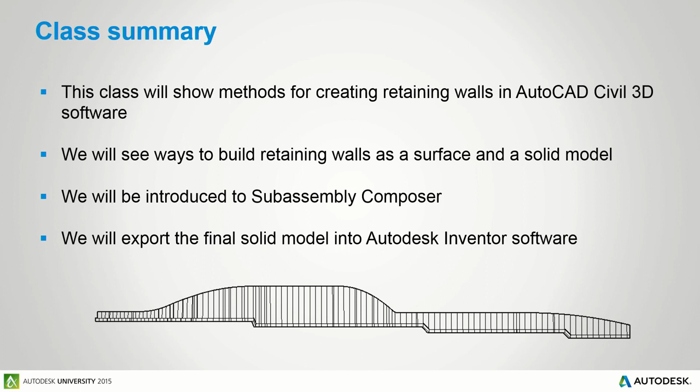Basically, the class stuff in a nutshell: you're going to learn how to design variable height retaining walls in Civil 3D. At the end of this session, you're going to be able to design a retaining wall, understand the principles of targeting, look at Subassembly Composer, and extract the model into Revit or Inventor. You're going to be able to design a retaining wall like that at the end of this session, and move it into Inventor or Revit. So you've got some good things to look at.

Also, in my notes, I put that this course was for all levels. Some of you put your hand up about going to the Ramp It Up thing, so you're obviously quite advanced users, but I'm sure there's people in here who are also beginners. That's quite a bold statement, saying we're going to deliver this course to all levels. One of your famous statesmen said you can't please all the people all of the time, and because there's a mix of people in here, I aim to please all of you some of the time. So some experts may think, oh, I've seen this before, and some beginners might think that's a bit over my head, but on average, you'll all get something out of this session.

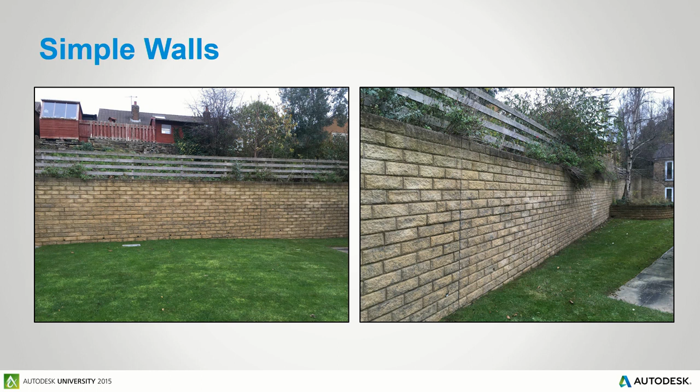But we're going to look at how we can create these in Civil 3D. I think the first thing I want to show you is that we're going to be looking at understanding the site that we're going to look at.

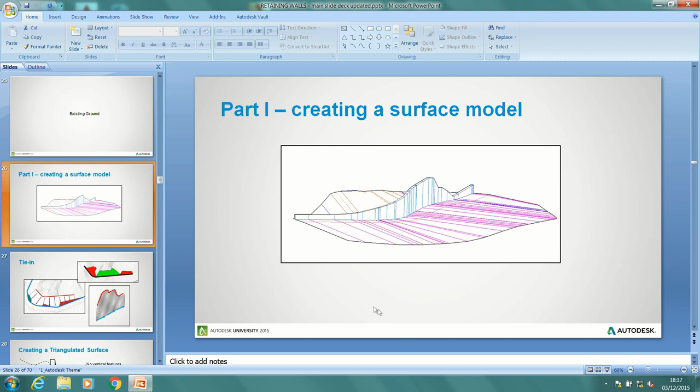Right, okay. Well, my apologies on this. What I will do is try and flip to the other PowerPoint if I can, and see if I can get to the point roughly where we are while the machine is restarting. Because we're actually going to look at creating a surface model like so.

And when we come to build a retaining wall, it's important that we have tie-in. How many times have you done a Civil 3D project and you've got the surface perfect, but not at the edges? It just doesn't tie in correctly with the rest of the model. So I'm going to be very mindful when we design our retaining wall models here that we have tie-in to the existing ground. And you'll see when my machine actually finally restarts that the road that I've driven around this model, I'm going to use that as a tie-in point.

Oh dear, that's not looking good. So Control Alt Delete, let me log in. Let's see if we have another type of input here.

And we're on number 5. So come on, please, we need to see the screen. But yes, no, sadly I see nothing on mine. Function 4. Okay, guys, I'm really sorry about this.

Bad, what do you got going on? Nothing. Okay, you need to get this up on the screen? Yeah, what are you on, number 5? 5, yeah, it comes on here. Just want to make sure we're still good. I can see it on the screen there, but not on here. Yeah, that's not good.

I suppose I could put a table at the front and just look at the screen like so. Personalize, display. Now, connect to projector is duplicate. Yeah, it's duplicate. I've tried that and the resolution goes all funny. Maybe you can just alter the resolution now on that screen. I could, but it's not putting it up there. So, it's just on there.

I have just done a reboot, so... It was up? It was. Just try changing the resolution there if you could. Exactly, adjust resolution. Right at the top. Doesn't give you much, but I can change it.

Hold on, I'm getting somewhere. You're getting somewhere? I think so. No, nothing. There's something. Wait, we've got lights, so can we duplicate that? Yeah, we have something. We're extending, let me switch it back to third monitor. What's the export, third monitor? Yeah, I've seen this on one other set.

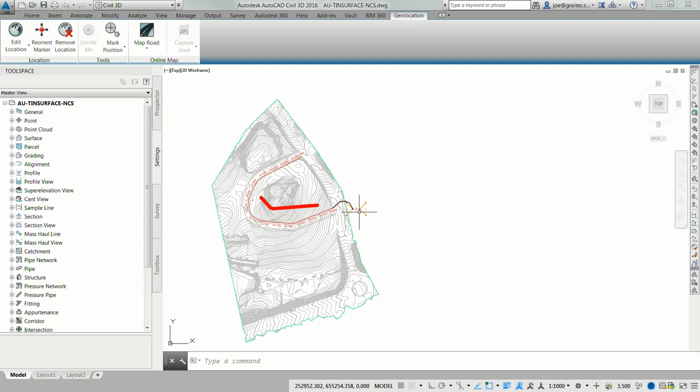And the red lines are where we're going to be building the retaining wall. This alignment here is the edge of the sidewalk upstand, because I made this particular road using this assembly, and the red line represents that point as the road goes round the track there, if that makes sense.

So what I'm going to do is just delete that, because we're going to tie into that, if you remember from my PowerPoint, which I'm going to have to open and put on the other screen. I really appreciate you guys being behind me on this. Yeah, as you can imagine.

And if you remember, what we're going to do is we're going to build the retaining wall. It's going to link to that blue line. Of course, the back of the wall, we need to get cut and fill into the existing ground. And we're going to be drawing vertical designs for the top of the wall and the bottom of the wall.

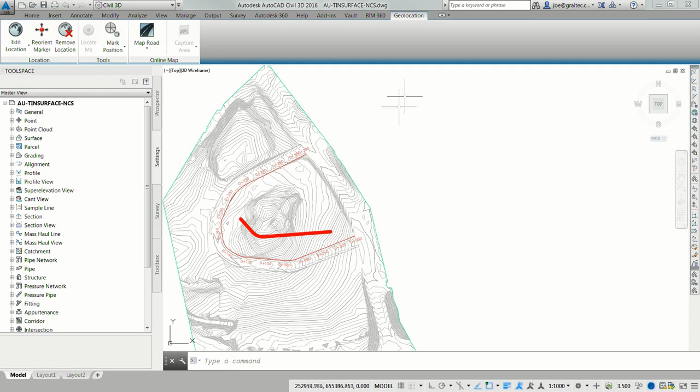Okay, so the first thing we need to do really is just have a look at the lay of the existing ground under here. This is a standard civil thing to do. We can go to profile and create a surface profile based on the existing ground, and we can add this and draw it into our box on screen.

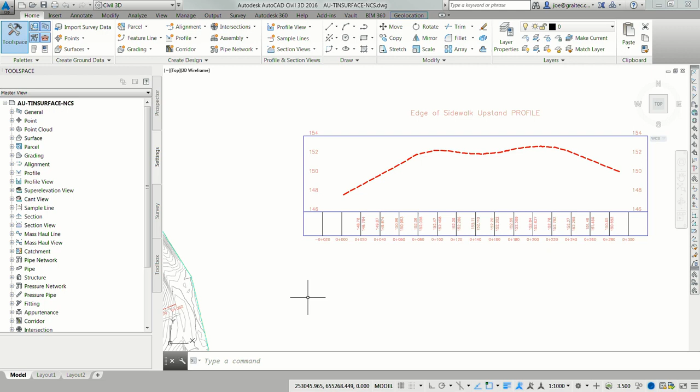So if I go create profile view here and press the profile there, you'll see we get a profile as the alignment goes around the road. And as you can see, it's a pretty smooth profile because I've already put the road on, yeah?

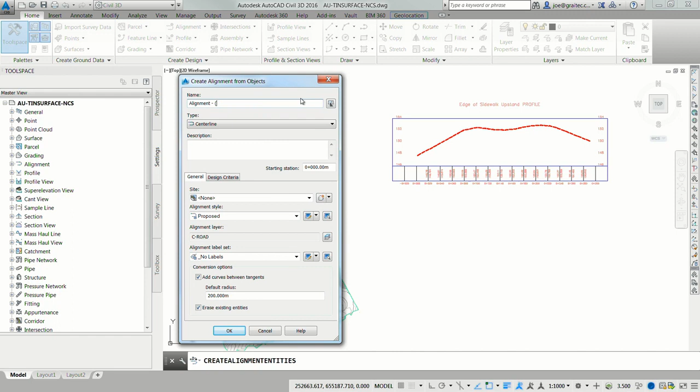What we're going to do now really is I'm going to turn this into an alignment. So if I go to alignment, create alignment from objects, and I choose our polyline, and tell it that I'm happy with the way the polyline is, I can call this alignment something like wall. I don't want anything between it, but I'll turn this into an alignment, and there you see it's there.

I'm just going to turn the surface properties of this surface off to border only, so that you can see it more visually. And again, what I'm going to do is I'm going to profile this new alignment, based on what we've got there. Now, that's the existing ground underneath that line there.

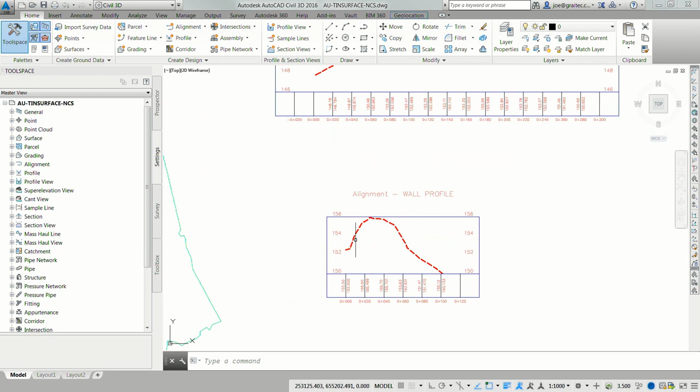But what we're going to need to do here is I need a bigger box because I need to work on this a little bit better. So I'm just going to go to the profile view properties, and I'm just going to tell the elevations of the profile to be a little bit larger. I'll have 4 meters one side, so I'm at 146, and we'll have that 160. Press OK, and you see it just makes the box a little bit bigger.

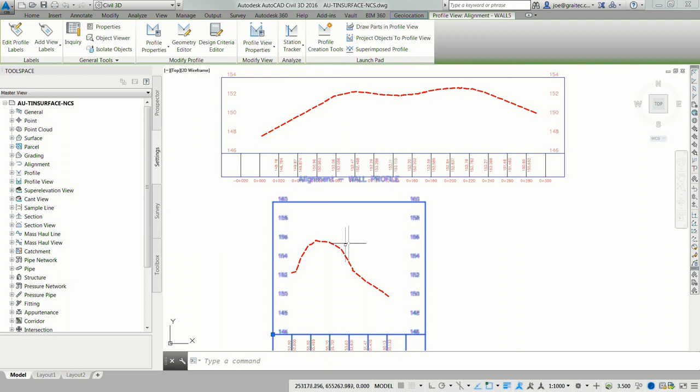And really what I want to do is see how this and that interact with one another. So I'm going to superimpose it. I'm going to select this profile here and superimpose it onto that one, if that makes sense. So superimpose profile into this box.

Now if I do superimpose that profile, notice that it goes right the way around my wall. So it'll look a bit difficult to read on here if I do it all the way. So I'm going to tell it to only do it between certain points. In this case, I'm going to choose that point there. Let me zoom in a bit as my start point.

And that point there is my end point. When I press OK, it puts the profile in position. The reason I want to do that is because I really want to see where that land is so I can tie into it. So you see I've got the profile for the top and the bottom of the wall.

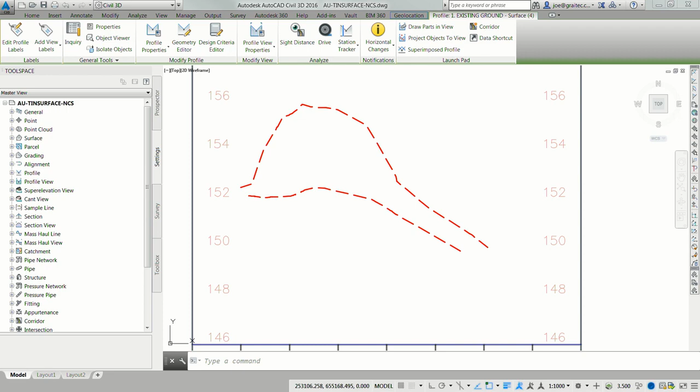Here we go, right. So what we have is we have a line for the wall which we've turned into an alignment. We've got the cut and fill of the existing ground. And what we want to have is the top and bottom of the wall. Are you with me? Bottom of the wall, top of the wall.

Now the way I'm going to work this is we're going to work on the shape of the wall that's like that. Now Civil 3D on surfaces doesn't like vertical features, so we're going to put a very slight slope on this, so that it is not vertical. And to get that, I'm going to use a 9,800% slope, because the higher the figure, the steeper the slope. It works on that equation there.

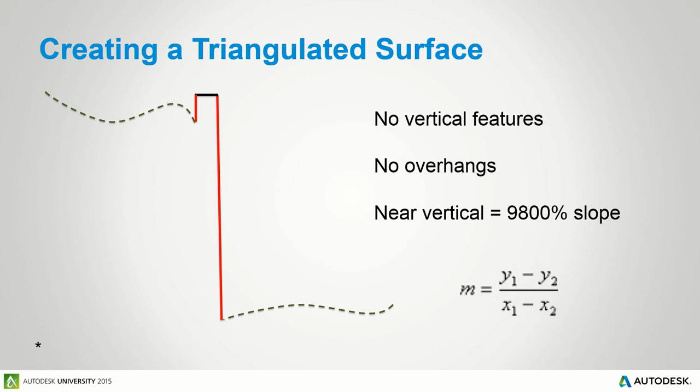So we're going to have a little slope on our design, on our cross-section, if you like, of the wall. And essentially what's going to happen there is that those two red lines will be near vertical.

And this is what we're going to end up with. This is a geometry we're going to use. We're going to turn it into a corridor. Everybody knows what a Civil 3D corridor is, don't they?

So when we come to do the corridor, this point here, this target point here, we'll be targeting our alignment. Does that make sense? Yeah.

And it will also be targeting an alignment which we're going to draw for the bottom of the wall. The top of the wall is going to be targeted at the top here. So as this is extruded along the course of the wall, this will grow between one target and another. Of course, we're going to have to put some sort of geometry down here in order to link in to this line, to fill in this gap here, which is where our housing's going to be. But nevertheless, that won't be a problem.

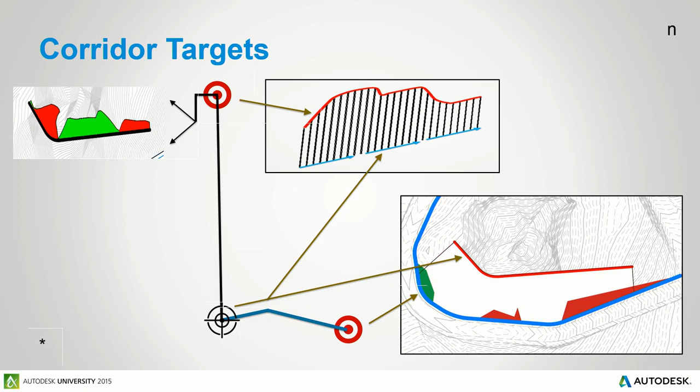And finally, we're going to target the existing ground up here for cut and fill. And we've already got the existing ground profile, and we've already got that projected edge of the sidewalk, haven't we? We've got those two profiles already.

What I'm actually going to do is add two more profiles. One that signifies the bottom of the wall, and notice I've put it up from the targeted ground, and one that targets the top of the wall. That way we can run this profile.

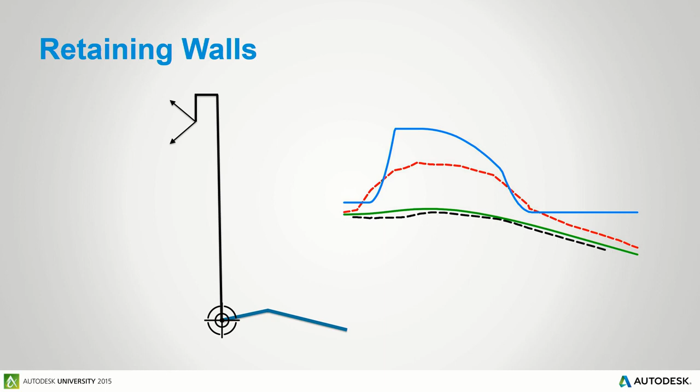The pavement upstand will target this black line. The bottom of the wall will target the bottom of the wall line. The top of the wall will target the blue top of wall, and the cut and fill is going to target the existing ground, which should produce us some sort of effect like that in Civil 3D, which will give us a surface with all those targets. Is everybody happy with that?

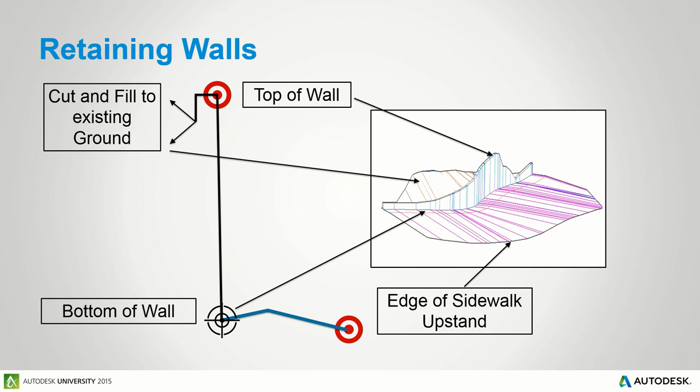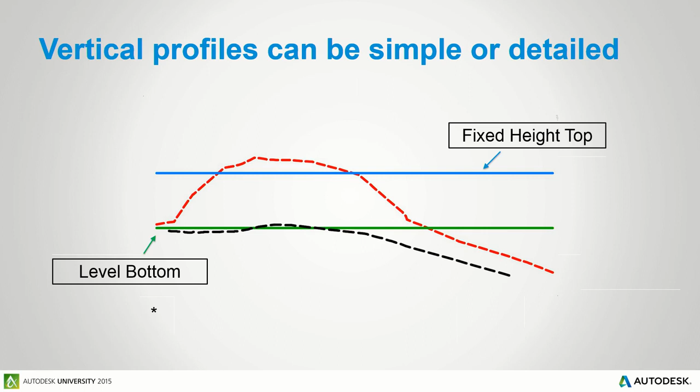So we've got top and bottom of wall, which we're going to look at making. But that top of the wall doesn't have to be variable, it could be flat. You could draw the profile flat, of course. Same with the bottom, or you could have them of a fixed height, top and bottom. So you've got the possibility of using all these, but I'm going to use the most complicated scenario where both top and bottom of the wall are varying.

Now to do this, we're basically going to be using the generic sub-assemblies inside Civil 3D. A bit freaky, but does anybody use those? I can tell you use them, Leo. Freaky, freaky naughty.

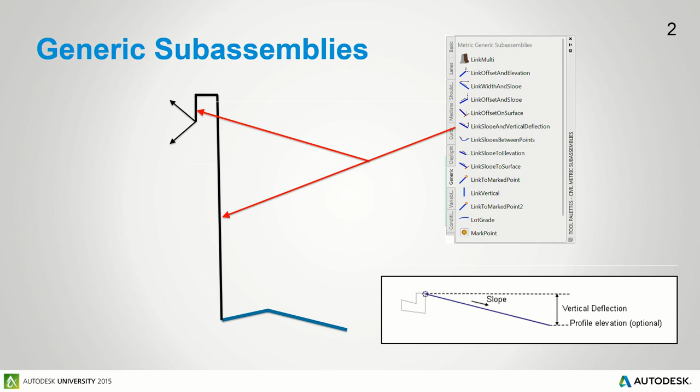Finally, we're going to use a basic cut, ditch, slope thing for the cut and fill. Now, I usually use my own cut and fill, but I'm going to use the one that's shipped with Civil 3D so you can see how it works. So let's see how we can go about building this wall.

And we're on this screen now, aren't we? So the first thing I need to do is draw the bottom of the wall profile. So if I go to profile here, profile creation tools, select this profile box. I'll just bring the box onto the other screen. I'll make a different design profile, call it Design Profile A.

And all I'm going to do here is just start drawing the bottom of wall. I better give it a name - bottom of wall, okay, I can't spell, but you get the idea.

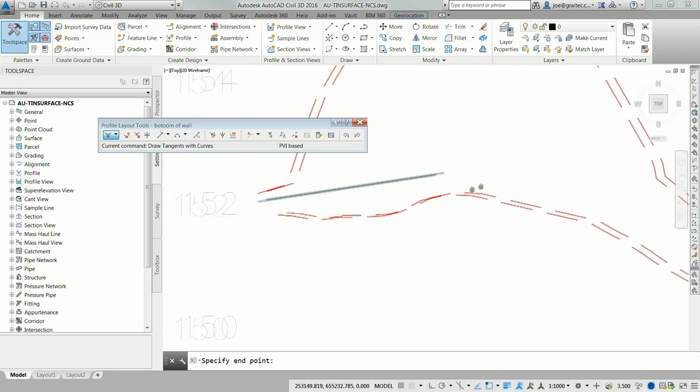When this box pops up, you'll see I can use all these tools to draw this bottom of the wall. Normal Civil 3D users should be familiar with this, but I'm just going to draw it using the bottom of the wall starting there. We'll have it going over there. It doesn't really matter, I can make this as complex or as simple as I want. If I tie it into the end here, it means the wall will tie into the existing ground, which is good. So there you see, that's the profile for the bottom of the wall.

I'm now going to make a profile for the top of the wall. Same thing, choose a different style. I'll choose style C. Again, I can make this as complex or as simple as I want, but in this case I'm going to...

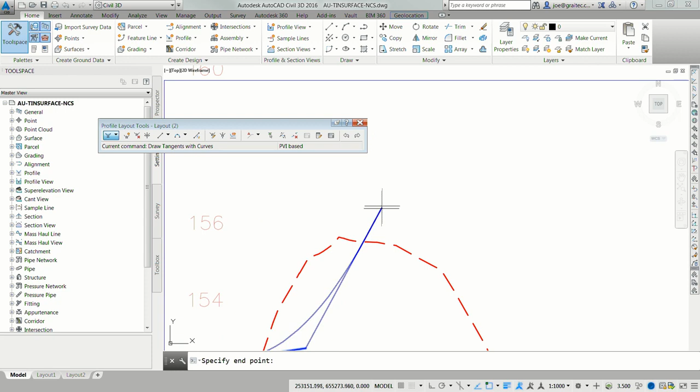Start the wall - come on, object snap - over here, and then we'll go up fairly high, across, down. Again, I can make this as simple or as complex as I need to make it flat, and then we'll finish the wall, say, up there.

So now what I've got is the two profiles I need for bottom and top of wall. All I really need now is an assembly to run across this. We can just create assembly from here, create the assembly down there, I'll call it wall, press OK, and put the anchor point there. Remember that anchor point is going to follow the bottom of the wall.

So what I need to do now is add some subassemblies to that, and I need the tool palettes on screen to do that. And here they are, here are the tool palettes. I'm going to use the generic tool palettes that I mentioned, the freaky ones.

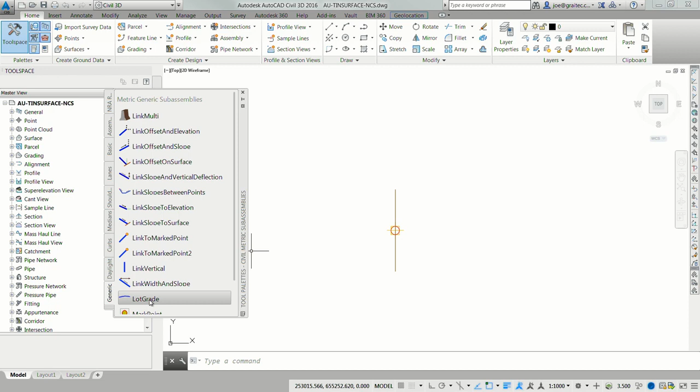And I'm going to start with a lot grade. Now, if you want to know what these do, you can just press function 1 - I know function 1 goes to the help, but I know I haven't got an internet connection, so I'm not going to do that. I'm just going to put the lot grade there. Remember, it's this point here that's going to target the edge of that sidewalk.

Then I'm going to put these link slopes and vertical deflections in. Let me just put one on. Oh no, it goes in the wrong direction completely. But if I re-examine the properties of that - right click, whoops, come on, right click, properties, come on, properties, where are you? There you go.

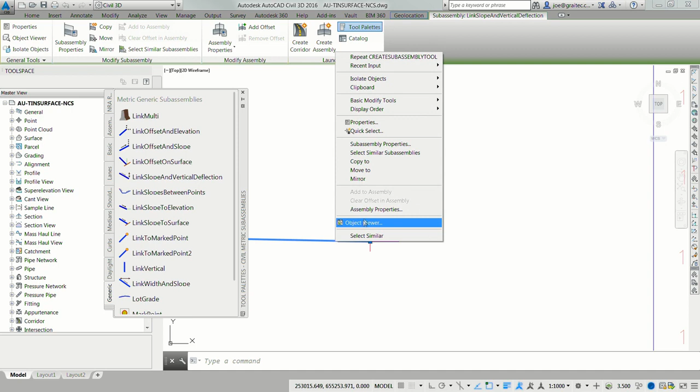And then bring it on the other screen - come on, you're on the wrong screen. Here we go. I can go down to this and I can change its slope. I'm going to make it 9,800%, and I'm going to make it vertically go up by, say, 10 meters. So you should see now that I'm beginning to build the side of that wall.

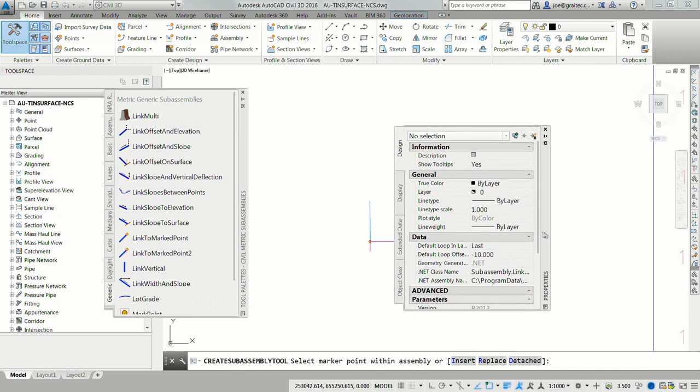And then the next thing I'm going to do, I'm going to put a link width and slope at the top here. Again, if I can crick my neck to see this properties sheet - I probably want the width a little bit smaller, say 0.5, and I want it flat at 0%, so that it's going to be a flat slope. And again, I'll just attach this to the top here like so.

Once more, I'm going to put a link vertical slope in. Again, I'll use the value of 9,800% because I want this to go down by about 0.5 of a meter, like so. I'll place that there.

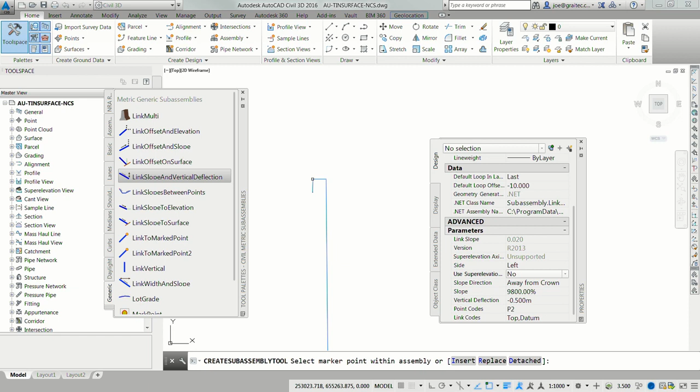Finally, I'm going to put one of the basic cut fills on, which will hit there. It's got a ditch on it, hasn't it? I'm going to make sure the values for the ditch are pretty small, so I'll have 0.2 there, 0.2 there, and 0.2 there. That should make it a nice little cut fill.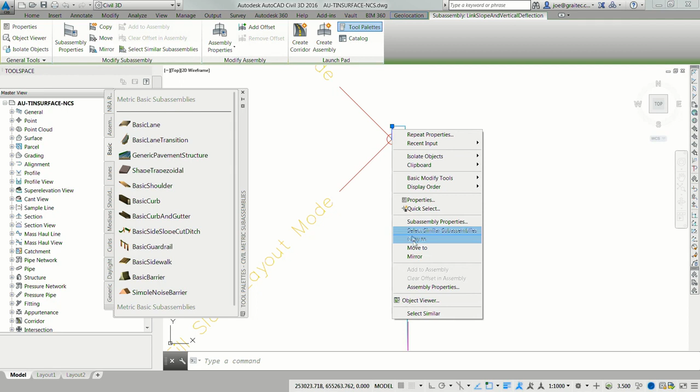Okay, I've got everything I want there. Remember, the ones involved in the targeting are this guy here and our cut fill. These other two, this one at the top, aren't being used as a target. So usually I'll rename them not for target, NFT, so I know I'm not going to be targeting them. I might spell that wrong, and I can hardly see at this angle, but you get the idea.

Next I'm going to make a corridor of this, because I said it was all about corridors. Let's call it wall. The alignment of the wall is going to follow the bottom of wall profile I made, isn't it? And the assembly I'm going to use is the one I've just made, and the cut fill is going to target the existing ground. Press OK, and this box opens.

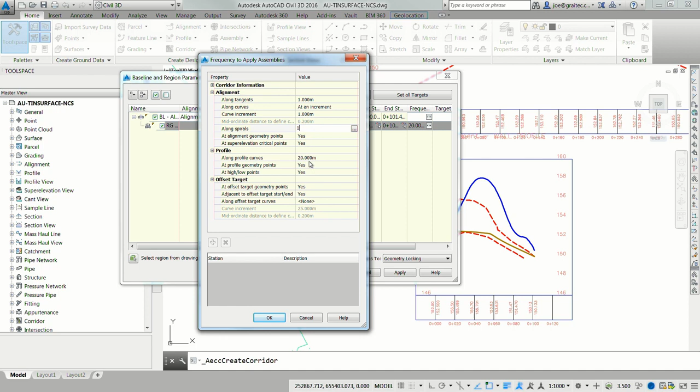Now, the targets I'm not going to be bothered with, I've labelled. Do you see? The lot grade, the edge of the lot, that's going to target the line around the pavement, isn't it? So I'm just going to add that as a target, so the end of the lot's going to hit that pavement target.

And then it's going to target vertically as well. So I just choose the edge of the sidewalk and tell it to target the vertical profile I drew up, if you remember. And then, of course, the all-important top of the wall needs to be targeted.

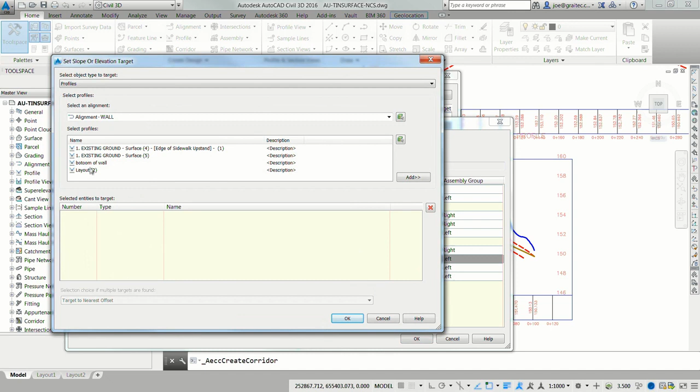Looks like I called it layout 2, sadly. I should have called it top of wall if we were going to do this properly. Press OK, OK, and then OK. And away we go - we should have a corridor.

If I look at this in Object Viewer, which is on the other screen, you will see quite clearly that we have, hopefully, a nice retaining wall. If I can only navigate on this second screen, I'd be okay. Let's try that again - there you see, there's the wall, drawn in situ. Does that make sense?

Now, that really is the quickest way of doing that. And Leo, you know, I've been to the Great Wall of China. I have visited the pyramids of Giza. I've even seen a grown man satisfy a camel. But never in all my days have I been able to make a retaining wall so quickly in Civil 3D.

Okay, so back to the PowerPoint, I suspect. So that's making our surface.

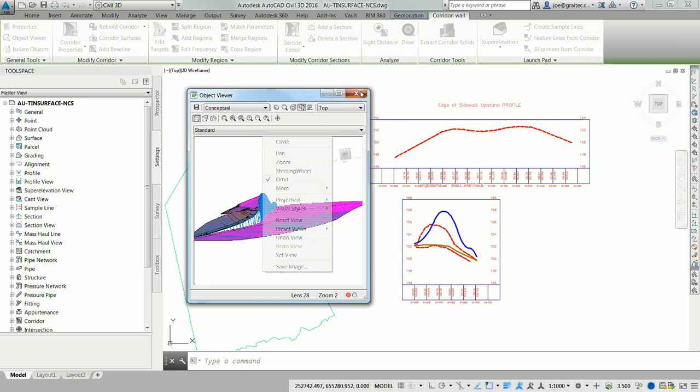We can also make a surface of that with a corridor surface, of course. But we'll move on from this because I want to take you to the next step, which is creating a solid model. We've made a surface model - the next step up is to make a solid model of that. The reason being, surface models are great in Civil 3D, fantastic, but you can't really take them out anywhere and do anything with them. They're great for showing a quick mock-up of what it's going to look like. But if you're building a wall, you really want a solid model to get its properties out of.

What we're going to do is take the targeting principles we used before, target to the top of the wall and to the bottom of the wall. We're also going to add things like stepped footings, because the footings don't follow the bottom of the wall, they're always horizontal. Also, we're going to look at variable width footings for our solid model. A cantilever design needs larger footings the more earth it's holding up, because that's what takes the load. So the higher the wall gets, the larger the footings need to be.

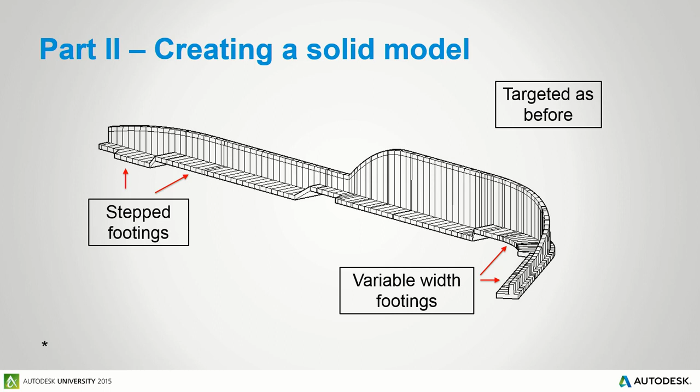But you don't want variable footings - the variable footings you need to be in distinct, discrete sizes, like 1 meter, 2 meter, 3 meters. So that's what we're going to do here, and there you see the example of the way that the footings can be different sizes to hold different loads.

Now, there's some stock retaining walls in Civil 3D. Has anybody used these? No, because they're not very good, are they? I've tried my best to use these stock retaining walls. And do you know, Leo? They're about as useful as a poop-flavoured lollipop.

So we don't use those, we have to design our own. And do you know what we use to design our own?

Subassembly Composer. I suspect that maybe 50% of this audience has never used Subassembly Composer. Is that right? Hands up who has used it. Well, that's about right there. Maybe 60% haven't used it.

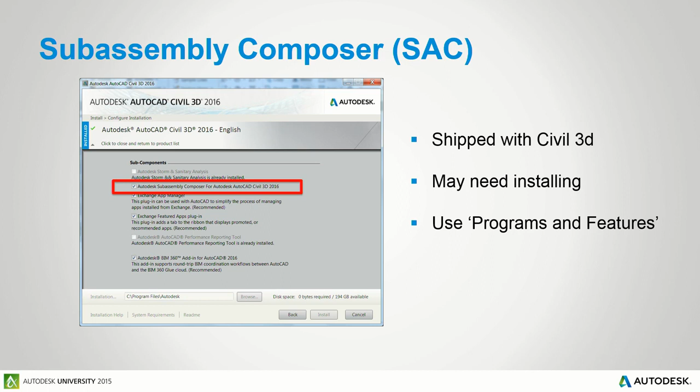What Subassembly Composer is, it comes with Civil 3D. You might not have installed it when you put the product on. And if you need to put it on later, just go back to Programs and Features and tick the box to install Subassembly Composer.

I'm going the wrong way, aren't I? Come on, go the right way.

So let's just think of the assembly that we want to design. Well, if you take the basic wall that we just had, we could make it into a solid by just basically filling it round, couldn't we? Where the bottom of the wall is targeted there, as it did with our surface, and the top of the wall is targeted there. We probably need an attachment point there to attach our cut and fill to.

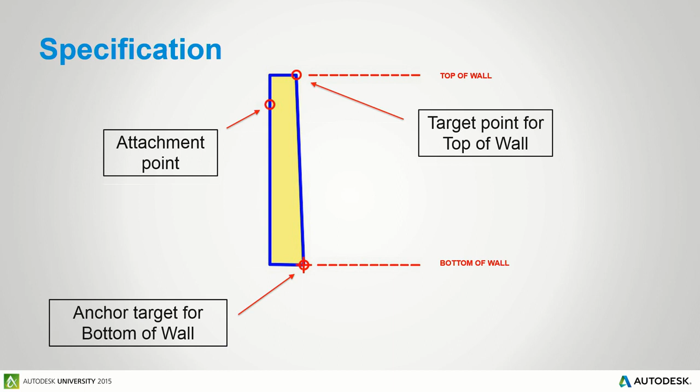But if you think about it, these target points that we're going to design in Subassembly Composer will appear in our targeting box in Civil 3D.

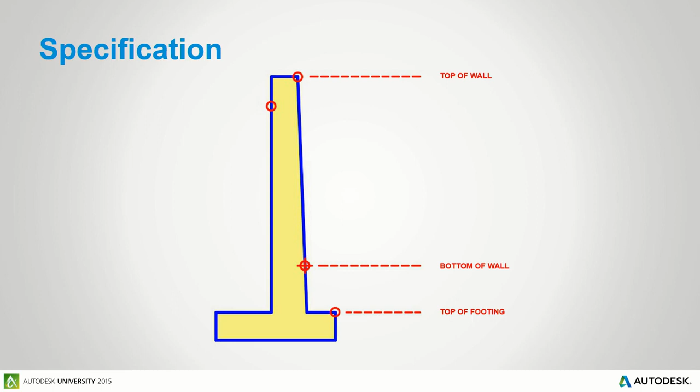And if we take it a step further and put the footings on, we probably need to have another profile to design where the footings are, which needs to be stepped. And this point here will be the target point for the top of the footing.

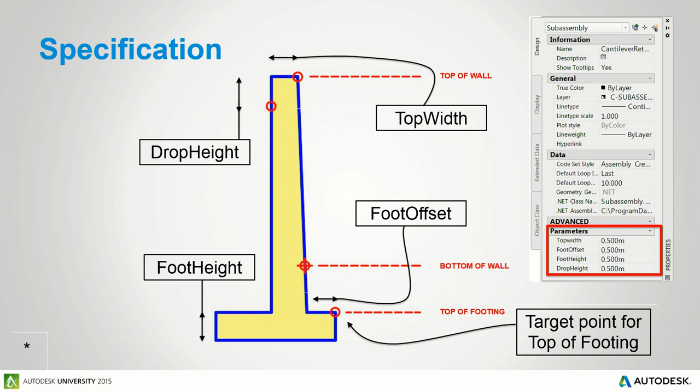And there are other types of variables we'd want to put inside our assembly, which will enable us to change it when we come to placing it in there. And these will appear on the assembly side - top width, foot offset, foot height, drop height. So we've got to think about putting these in our design for Subassembly Composer.

And then we come to the variable width footings. Now this is a tough one, because as the wall height changes, as it gets bigger, this foot width has to change and get bigger too, so that the cantilever will actually work.

And to do that, I'm just going to use the mechanics of a very simple table. I'm going to say if that wall height is less than a metre, we're going to have a 1.5 metre foot width. If it's between 1 and 2.6, we're going to have a 2.5 metre foot width. And if it's greater than 2.6 metres, we'll have a 4 metre foot width. You could have a lot larger table - I'm just demonstrating the point here, and I want to show you that we're going to work on this very simple table.

So before you start, create a specification document, is my advice - something like this. So don't crack open Subassembly Composer, roll up your sleeves and try and get working, because you'll get lost very quickly. You need to think about your design first. Put a specification document together.

Now, is it necessary to have a specification document, Leo, do you think? Necessary? I'm going to use that quote again because it's my favourite - I can use it twice. Is it necessary for me to drink my own urine? No, but it's sterile and I like the taste. So yeah, we're going to refer to this specification document all the way through when we're in Subassembly Composer.

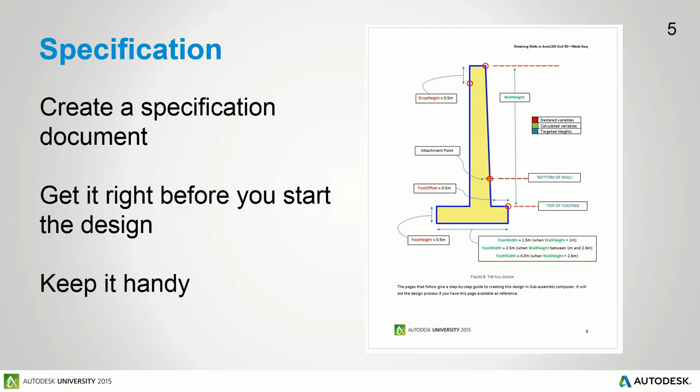Right, let's see how we go for this now. So, Subassembly Composer - you can't see on my other screen, but I'm just opening it up.

I'll drag it across onto our main screen. For those of you who've seen this before, or haven't, all our geometry and functions are on here. This is a flow chart that shows you how we build things. We can see the properties here, and over here is a preview of what we're going to be building.

Now what I'm going to do first is click here and put those variables that you see on my specification document. I'll take these parameters and put, say, top height. That'll be the height at the top of the wall, and I'll make it a default of 0.5 of a meter. If I put something in that I'm not saying, tell me.

So the next thing is drop height. That's another variable, and I know these variables need to be in there because I've made my specification. I'll have that at 0.5, and then the next variable is going to be called foot height, which is the height of the footings. Again I'll set that to 0.5.

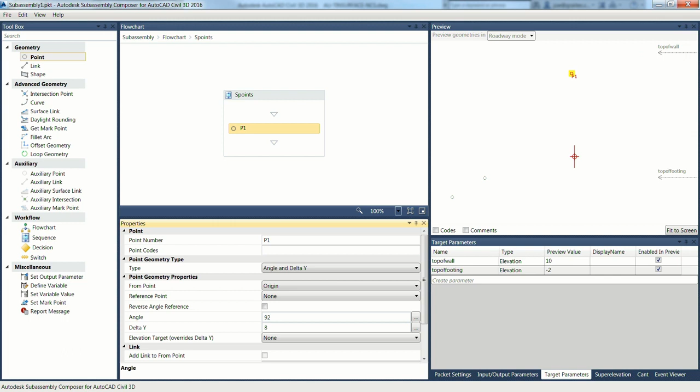But I'm going to override this with the elevation target, so that whenever the top of the wall changes, it's going to hit the top of the wall. Did you see it change there? That's my first point. Second point, let me drag this in.

For the second point, I'm going to change this with delta y and delta x, adjusting it in x ever so slightly with the top width variable. So if I take minus top width here, it will make the new point just over here, 0.5 of a meter from my original point. Has it done that? Let me see from where I am.

Delta x, delta y. I've spelt it wrong, haven't I? Yeah, what did I call it? Case sensitive? Top height, I called it. No, it's not case sensitive, but it's idiot sensitive, I think.

So there we go, that's the top one. The next one I'm going to drag down is point 3, which is going to be the drop height. So again, I'm going to choose delta x, delta y from point 2, and make it minus in the y, minus drop height.

So you can see how I'm constructing the points in this assembly. Those points there. So the next one I want, point 4, probably needs to be a point down here somewhere. I'm going to note it from the origin, and make sure it's 88 degrees. I'm going to have to change it to angle and delta y. My angle is going to be 88 degrees, and I'm going to take it -1 down.

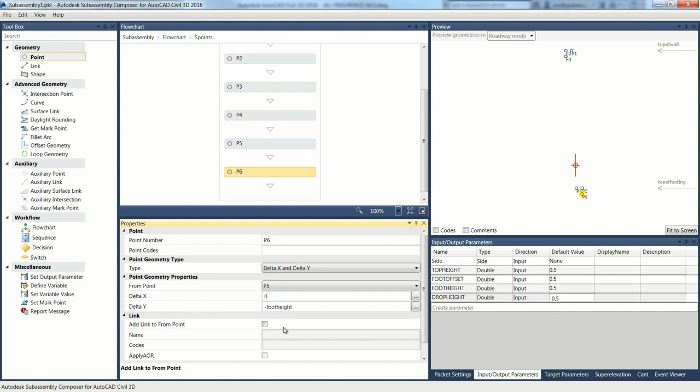Now we've got to consider our very important foot width. Remember, that's been defined by this table. We want the foot width to be dependent upon the distance between the top of the wall and the bottom of the wall. Now, I've got to put a variable in there to control this.

And to put the variable in, I just click out this flowchart and add another sequence in here, and I'll just call it variables. Because I actually do need to put some variables in there.

The first variable I want to define, again, I just drag the define variable in there. The first variable I want to define is the wall height. We need to know the height of this wall. And that's going to be the difference between the y-coordinates of this point here, P1, and this point here, P4, isn't it? So I can just put an expression in.

It's quite a simple way of putting expressions in. I just choose P1, find its y value, and take away P4's y value. And that will give me a variable of wall height. And as we run this across the alignment, the wall height will change. So that's the variable that we choose.

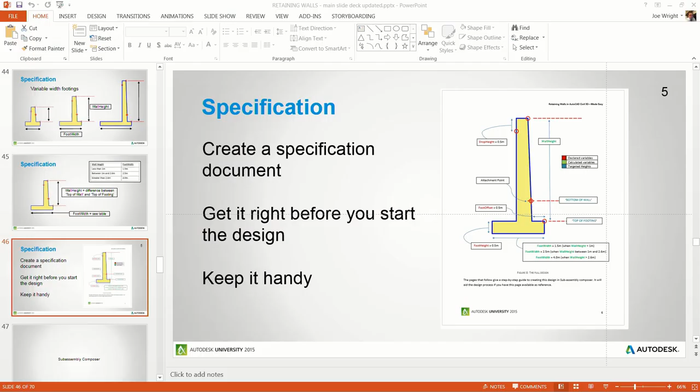But I also need another variable called the foot width. And this is dependent upon wall height. So how are we going to do this? I'll put it in first, foot width. And we'll just pop back to the PowerPoint so I can explain this in a little bit more detail.

Right, so how are we going to get it to calculate this all-important foot width? Well, you see the table is there quite simply. And we're going to use an if statement. Has anybody used an if statement before? One. Well, you know, Leo, this is going to separate the men from the boys.

From the possibly feminine and the definitely Canadian. So you look at this if statement, it sometimes can go over people's head, but this will make Subassembly Composer useful to you. Let's just spread it apart a little bit first, because the if statement works like this.

It gives you a condition first. It says, is wall height less than 1? Well, if it is, it's going to give you that number there, 1.5. If it isn't, it's going to give you that number there, 2.5. So even though it looks complicated to start with, the if statement's very basic. It asks a question, and if it's true, it does one thing, and if it's false, it does another. Now, that caters for 2 of our 3 possibilities in this table.

Let's just have a look. I will actually copy that out, because I can't be bothered typing it in. Copy. And then I go back to Subassembly Composer, not Civil 3D, Subassembly Composer, and I'll go down here and Control V to paste it in. And it looks like I've missed a bracket.

Yeah, okay, so cool. And that's our if statement, which is going to control the width of that footing. Now that I've done that, I can continue putting my points in.

So what I'll do is make another sequence here. Whoops, come back here. Yeah, there we go, double click, and I'm going to add more points. So my next point here is going to be point 7, which is going to start from point 6, but it's going to go back based on that foot width that I've just defined as a variable.

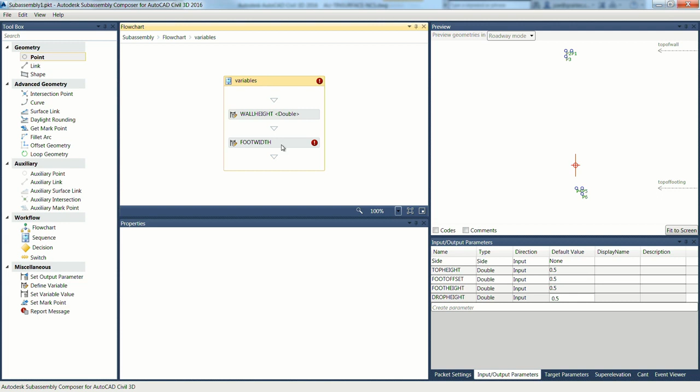Yeah? Oh, maybe it's not. Let's have a look. Did I call it foot width? It is capital sensitive in this case. Oh, it doesn't like it for some reason. Variable type - I forgot to give it a double. There we go, fantastic.

So if I go back into here now, point 7 is defined as minus the foot width. Is that looking... yeah, it's spot on. I don't know what the green thing is though, that could be a problem. No, that's my cursor, that's why. Right?

Let's do the next point, which is going to be up by this foot height that we defined. But obviously I need to choose point 7 to go up from. And then the final one needs to be where this and that intersect.

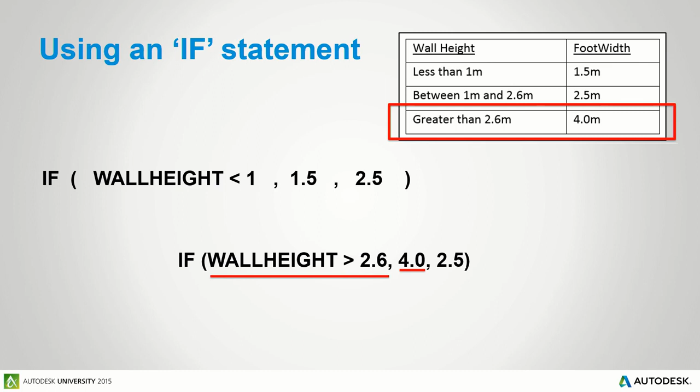Let me show you that on the PowerPoint. And click. Going back, aren't we? Too many animations on this slide. So there we go, that's where we got to.

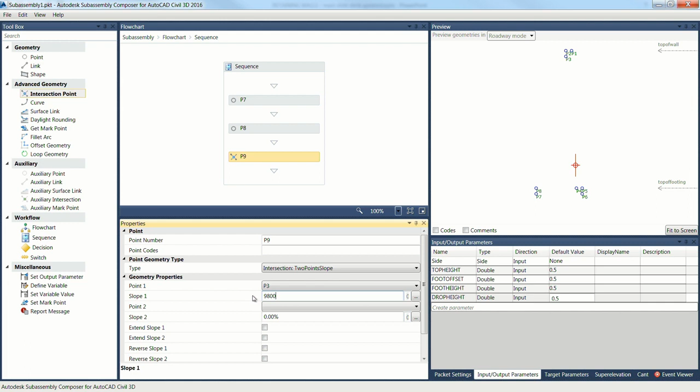So let's go back to Subassembly Composer. At this stage, what I need to do is add what we call an intersection point, do you see? I drag this down, and I want it to be the intersection between 2 points and a slope. My first point is going to be point 3 at the top, which I want to come out down 9,800%, nearly vertical. The next one's going to be point 8, and I'm just going to extend that to there. You see, it gives me the confluence of the two.

Just check that looks all right from here. Yeah, that looks good. So do you see we've got the points that make out the side of the retaining wall. So now what do? Well, we need to put meat on the bones - we need to add lines to join these points together.

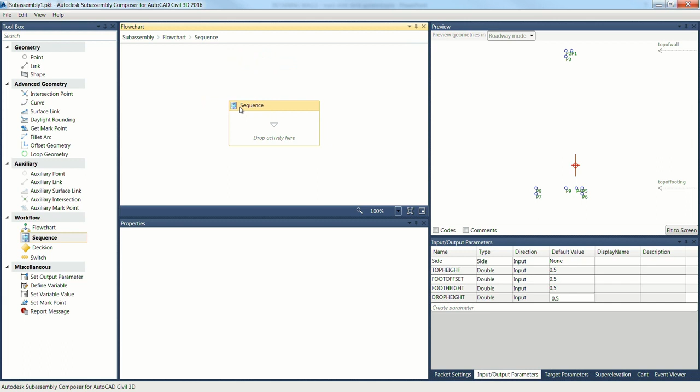Now that's quite straightforward. I'll add another sequence - no, I won't add that. I'll add another sequence first of all here, and double click to go into that sequence, and start adding links, which are lines. So if I drop the first link in, I can choose that I'm going to link point 1 to point 4, for example, which puts that line in.

Yeah, drag another link in. I'm going to link point 1 to point 2. This is a little bit of a laborious task, so I just ask you to bear with me. Next link in, point 2 to point 3.

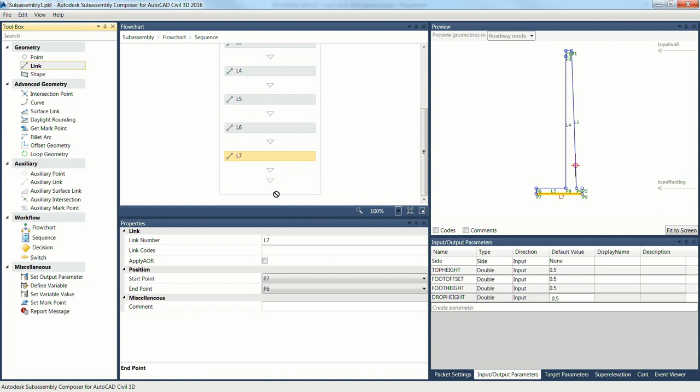Next link in, point 3 to point 9. Next link in, point 9 to point 8. If I screw up, guys, tell me - I can hardly see the screen. Link 6 is going to be point 8 to point 7. And then we're going to have point 7 to point 6, and then point 6 to 5. And there we go.

We should have a fully encompassed assembly. Do you see? Have I missed something? Oh right, yeah, well done. You guys are on my side, I appreciate that.

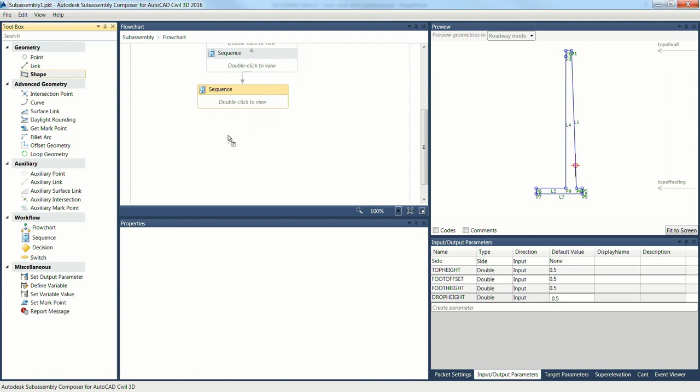So we'll put the link right at the bottom, 4 to 5, was it? It doesn't matter which way, either will work. So now we have it fully encompassed. But we want to make this into a solid, so we've got to put a shape in the middle of it - that's what this shape does here. So I bring the shape in, and all I need to do is choose something inside that, and it will make a solid of it.

I can now finish with Subassembly Composer - I've done my design. So what I'm going to do here is just save this file. I'll call it AU 2015. Why not? And we've done - that's our subassembly composed, if you will.

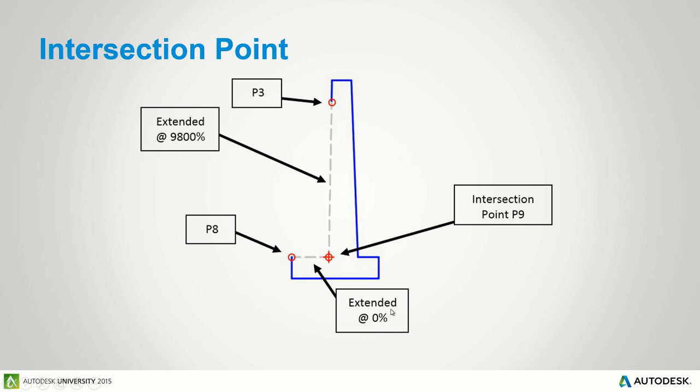So now what we need to do is just look at the PowerPoint just to make sure. So now we've got that - we're going to make it into a solid model. That's all we need, really, was that assembly to include in our corridor to make that. Let's see how it's done.

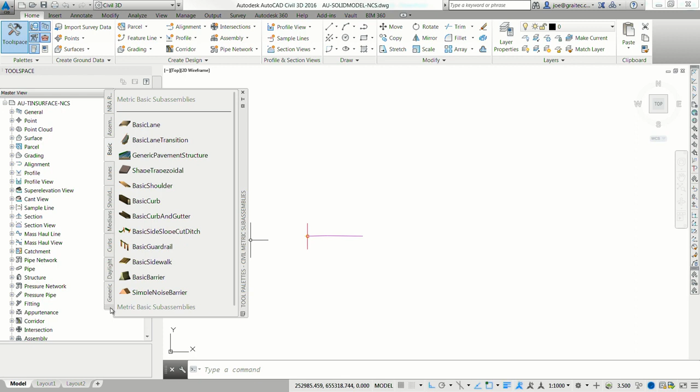What I'm going to do, I'm going to bring in a new assembly, and to do that I'm going to have to import it onto a tool palette. So I'll right-click here and make a new tool palette - I'll call it AU 2015. Then just right-click and import subassemblies, give it a source file name - let's say AU 2015 - and press open. And it will put it on there.

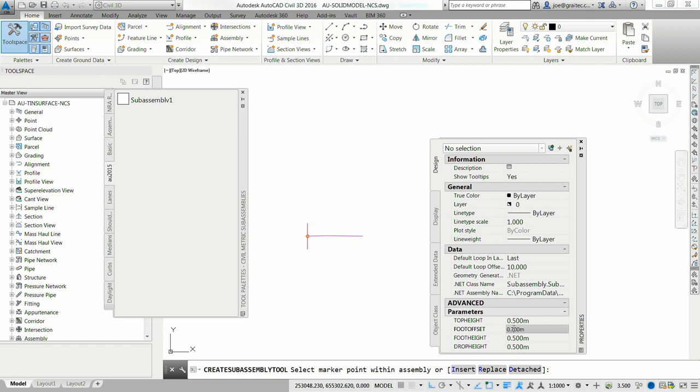I should have really saved it with a picture, but I didn't. When I click it now to bring this subassembly in, notice my variables are at the bottom here - the top height, the top width, the drop height and so forth. All these are changeable. So if I wanted the foot offset to be 0.7 of a meter, I could change it to say 0.7. Then I can just drop my assembly in the drawing here on that particular tab - do you see? It's in.

Done. All I need to do now is maybe just put the basic cut, fill, ditch, slope thing on, and I should have an attachment point there because I designed that point in my assembly - can you remember?

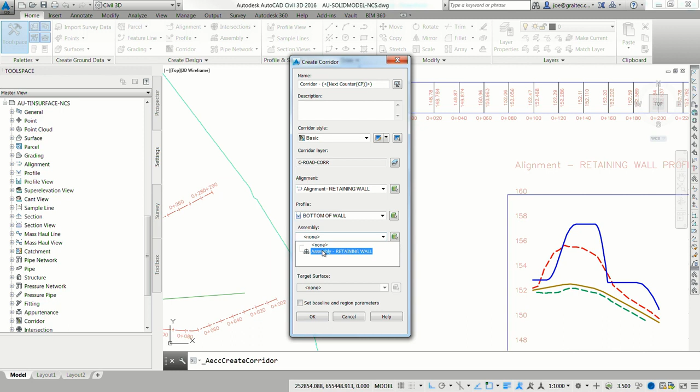And I'm really ready to run this now in the corridor, so let's make a corridor of this. You all understood how I built it. I'm using the retaining wall alignment again, and again I'm following the bottom of the wall profile. The assembly I'm using is the one I've just designed with my Subassembly Composer thing in there, and the target surface is going to be the existing ground just as before. I'll just change the frequencies as I did first time round, just so it looks a little bit nicer.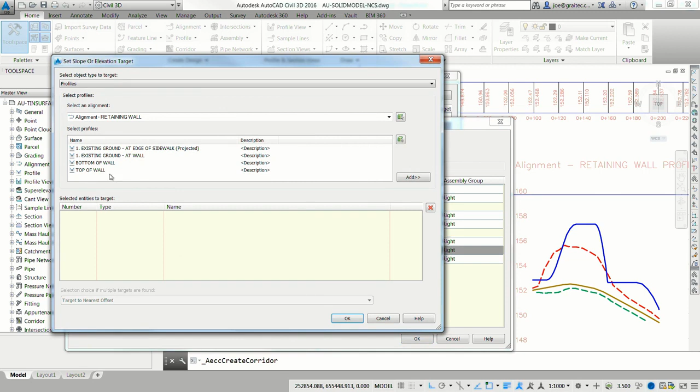2, 2, 2, 2. And we'll look at setting the targets. Now the targets are a little bit easier to understand now, aren't they, because I gave them names in Subassembly Composer that make sense. So first of all we've got this lock grade we need to target just as before - there's no change in how we target that from the previous exercise. And then we can target the top of the footing, which we haven't got yet, so I need to draw that. But at this stage I can target the top of the wall, can't I?

Like so - and this will make a corridor without the stepped footings. So press OK, OK again, rebuild the corridor. And there you see I have my corridor, which if I look at it in Object Viewer, and if I can navigate at this angle, you will see I've got my corridor there that's essentially ready to go.

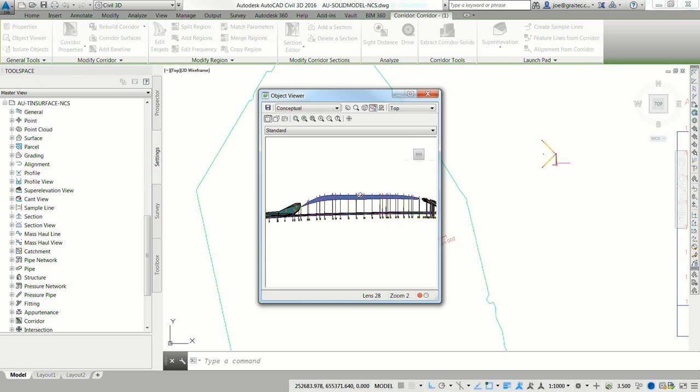Just look at it from an elevation, but you'll see the footings are not stepped - can you see that? The footings are actually following the bottom of the wall. That's not what we want - we want the footings at discrete levels. So how are we going to do that? It's easy, we're just going to draw a profile - another profile. Let's do that.

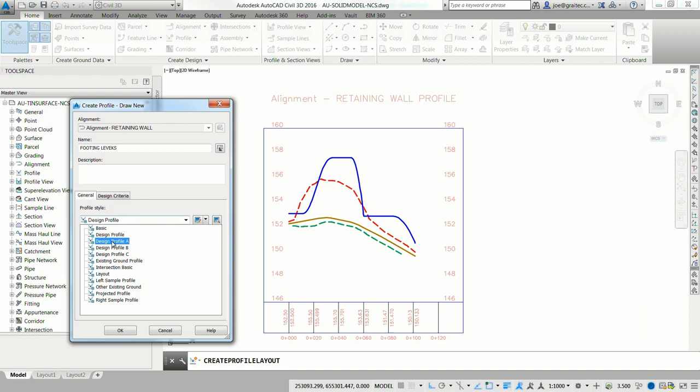So go to my profile box over here. Again, pretty standard Civil 3D stuff, drawing profiles. You click the box, I'll call it footing levels. It's spelt wrong. And I'll give it another design profile, I'll call it A, and place this on here.

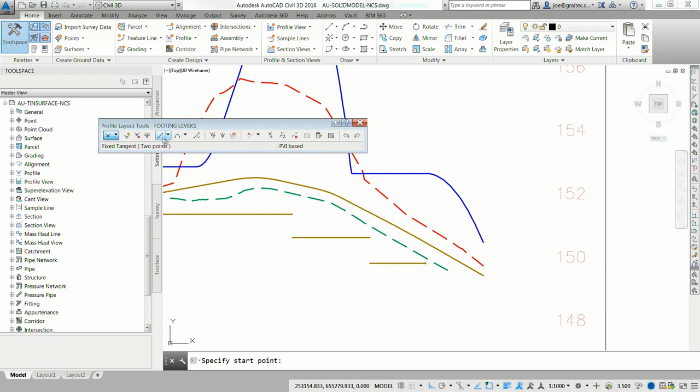When we come to drawing the footings, because when I'm levelling, I'm just going to use simple lines. So I'll put my footing there, and then draw another one underneath. I'll try and keep it flat - it's really weird, it doesn't look flat from this angle. But do you see what I'm doing to get these footings in place? I'm just drawing a profile out. So there, that's where my footings are going to be.

Now, of course, I can go back to my corridor here, corridor properties, and go to the targeting parameters again. Now I've got this profile drawn, I can target the footing levels like so. And that will rebuild my corridor so that my wall now has stepped footings.

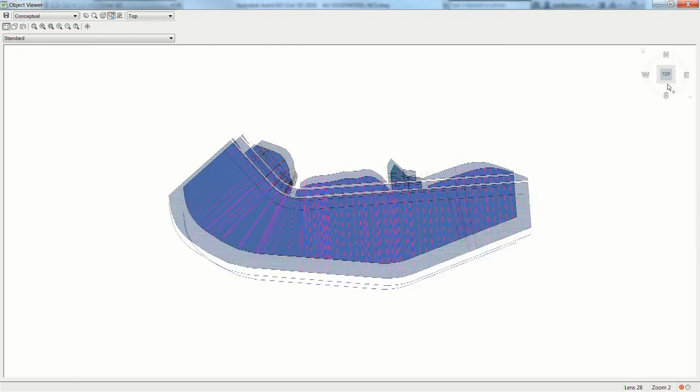And you can clearly see the stepped footings on the elevation. And if we look at this, you should also see that we have variable width footings too - at certain sizes of wall, the footing widths change. And this gives us essentially the basis for our solid model.

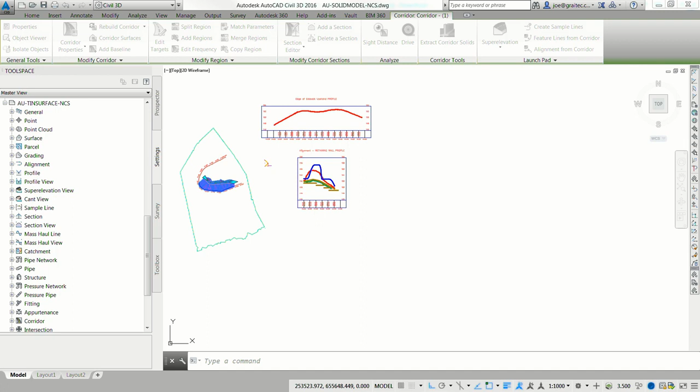So the next thing I'm going to do is create a solid model from this. Simply highlight the corridor, and you see where it says extract corridor solids? Click on that, and this box comes up - it's just going to make solids from this corridor. I'm going to add all my regions here, and I'm going to take the lock grade off because I just want the information from my subassembly. Do you see? And I go next.

I usually add it to a new drawing, to be fair. So I'll call it AU 2015 solid, hit save, and then create solids. And what that has done is it's just gone away and opened it. If I can find the drawing - what do I call it? AU 2015 solid, not in that folder. Where did I put it? AU 2015 solid, there she blows.

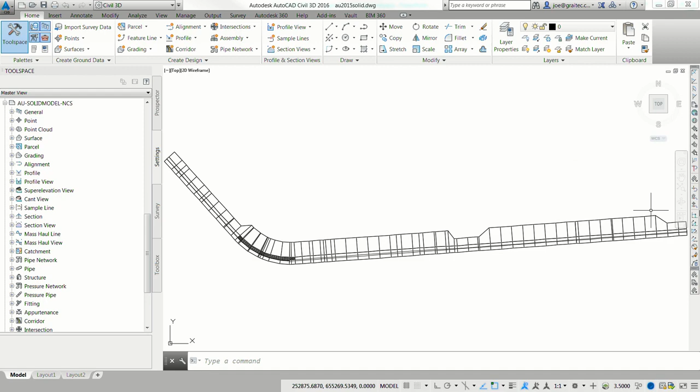And when this opens, you'll see it's created a solid model of the wall. Do you see? Let's put some presets in - visual styles, make it hidden so it looks a little bit better. And there you go, using those simple steps, we've got a full solid model of our retaining wall from Civil 3D. Everybody happy with that? It's a quick and easy way to make that solid.

Okay, so now we're going to look at improving this. How much time have we got left, gentlemen? About 10 minutes. Right, okay, we're just going to look at the Inventor stuff then.

I'll quickly run through the Revit stuff. So we're going to do a round trip export. Now you might have seen exports to other things, but we're exporting into Inventor and Revit here, and I want it to be a round trip export. None of this just taking it out, working with it and then forgetting about it. I want to take it out, improve it, and bring it back in and use it, in both cases, Revit and Inventor.

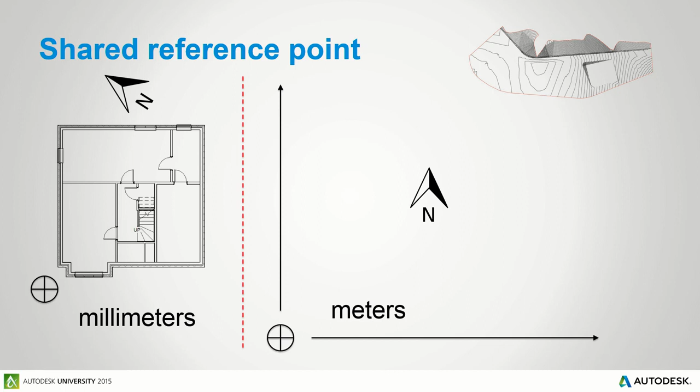You take your Revit model, which is at 0,0 and is square, and then you've got your civil model, which is basically thousands of meters away from a 0 point. All the shared coordinate system does is take the Revit model and put it into the right coordinates in civil. We're not going to look at that, but I've put notes on the AU website that show you how to do that both ways, in and out.

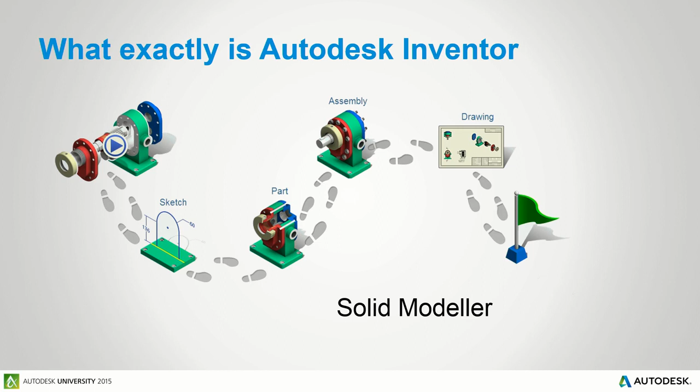We're going to look at linking to Inventor. Inventor's a solid modeler, it works on parts, assemblies and sketches. It's a very powerful solid modeler. I've used it for about 15 years. You can do things in Inventor that are so awkward in AutoCAD. So to take your solid model and put it into Inventor, build good models there, and bring it back into AutoCAD is a fantastic way of doing it.

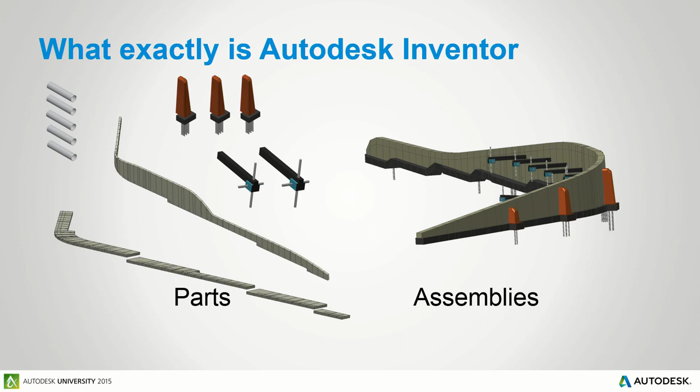Inventor's more of a mechanical-based product, but it works on parts which are assembled together into an assembly. The same could be said about our retaining wall - there are many parts to it. For example, we might have pipes for weeping holes, we might have buttresses or dead men, and we can assemble these together inside Inventor quickly and easily.

When you come to build it, each component has its own reference. So our complete wall will be made of the wall, the footings, and maybe a buttress, which will be made of rebar and stonework and other stuff. So there are many, many files that make up an Inventor-based document.

Let's have a look at taking this model out. I'll do it quickly, I've only got 15 minutes left - 5? Really? Okay, so I'll show you quickly how we do it, the essence. The essence is that we have the model here, which is refusing to work. Come on.

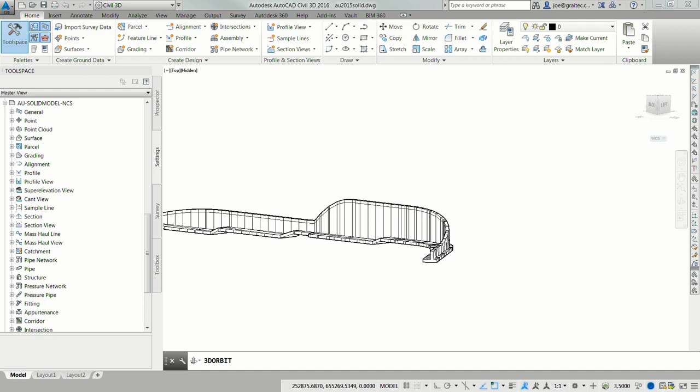Okay, I'll tell you what we'll do. We'll run through the PowerPoint and I'll explain it, as it seems to have locked up again. I've been doing this class for around 12 months now, and this is the first time I've had problems with the equipment.

Right, okay, as there's very little time left - essentially, the import and export routine is covered in a document that is on the website. It takes you through exporting from Revit, exporting from Inventor, and importing from Inventor. But the essence of what we have there is quite simple.

All you do to get it into Inventor is take it from the coordinates and move it down to 0. If you don't move it down to 0, when you export it from Civil, it's unusable in Inventor. The way you get it out of Civil is you type ACISOUT, taking it out as an ACIS solid. Then you can open the ACIS solid inside Inventor and work on it. When you're finished, save it as an ACIS file again, and bring that ACIS file back into Civil 3D. If you saved the reference points you used, you can put it back into its global position.